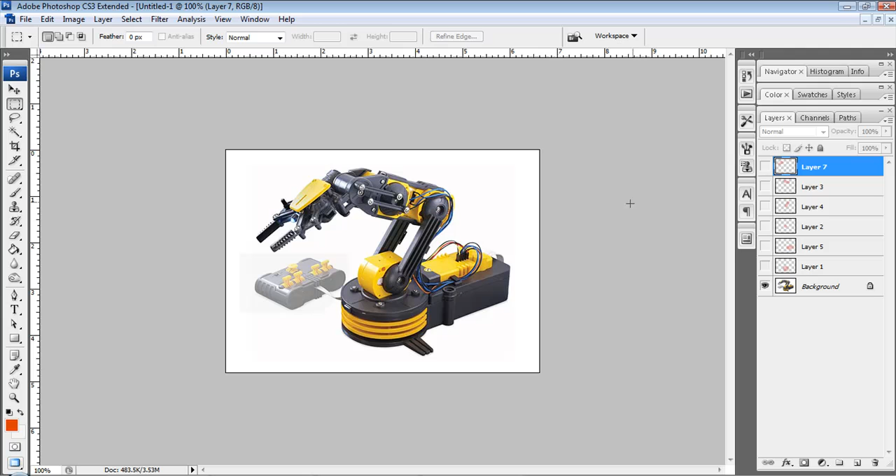So let's break down the actual model. The lower section here would be broken up into two parts, the cylinder and the rectangle at the back. I'm ignoring these pieces here and just looking at the underlying shape. The middle section would be a rectangle and another rectangle, and the top portion would be a rectangle and another rectangle. I would ignore these pieces and just create this shape right here.

Same with this, I would keep this as one big rectangle all the way up here and ignore how this thins out to meet that cylinder. Once this is all set, it's very easy to add more detail, and doing it with the blockin first helps me keep the mesh a lot cleaner and everything ordered. It's less of a headache when you don't have to move all these little pieces around because something is off or the wrong size. So with that said, let's open up Max and start modeling this little arm.

Alright, so let's start modeling our blockin. The first piece I want to build is going to be this cylinder. So let's start off with that.

By going to the Create tab, you're going to want to click Cylinder. Then click, drag, release, and drag again, and that'll give you your height.

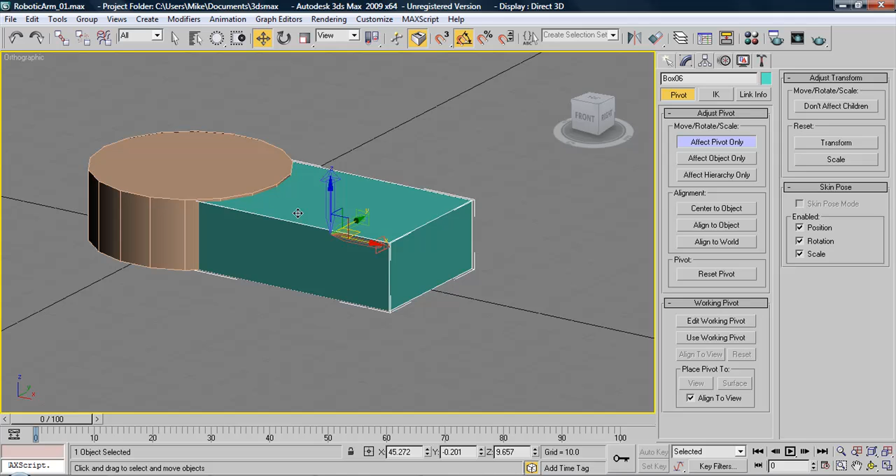So for right now this is fine. However, for this part I want to make sure it's centered to the object so that I can center it to the grid. So I'm going to go into the Hierarchy tab, hit Affect Pivot Only, and then Center to Object. And what that did was apparently center it to the object along the y-axis, but on the z it wasn't, so it'll center it to it.

Now what I want to do to make sure this is properly positioned on the grid is, down here it tells me where this object is located in space, but I want the y-axis to be located on 0. So I can either type it in, or I can right click it, which will zero out that spinner.

This works on anything that has these double arrows, whether it's in the parameters or wherever. Right clicking on the actual arrows will zero it out. So let's check this and make sure it's properly in place. And it is.

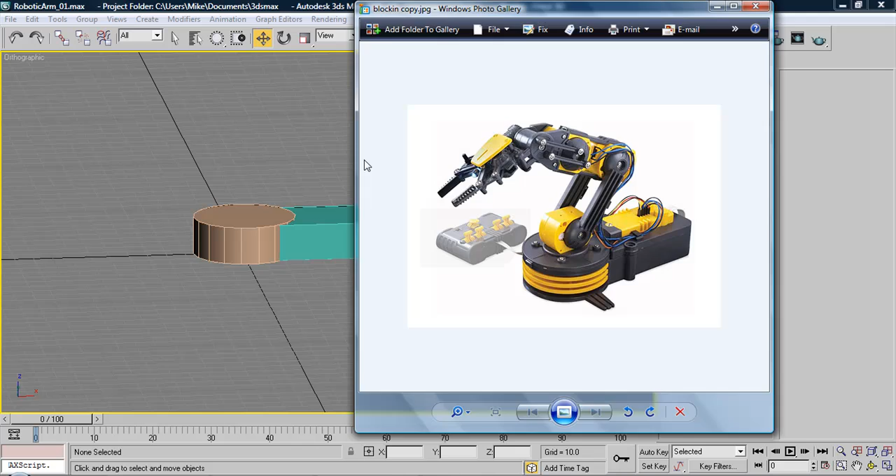Let's start off with this middle section here. We'll build this piece as a rectangle, then go to this piece, which is also a rectangle. Just affect pivot point, center to object, zero out, and then affect the scale. I'm using hotkeys for these buttons, which is W, E, and R.

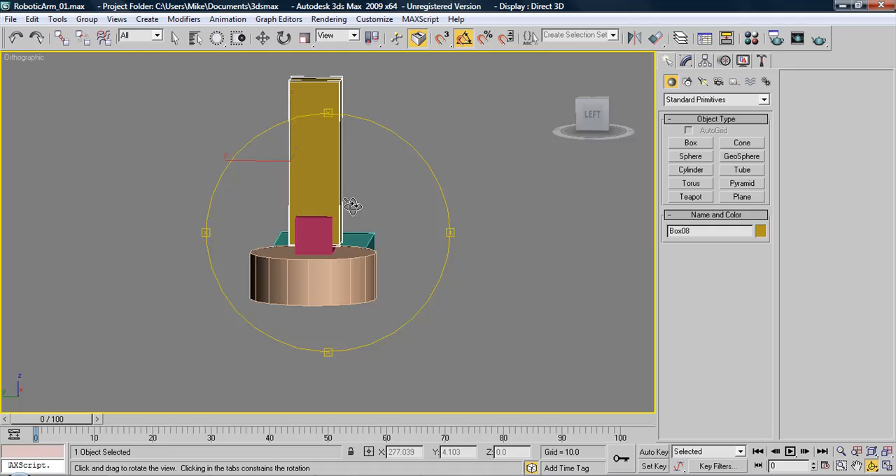Now let's build this piece here, which is going to be a rectangle as well. Zoom out a little bit, spin it around, and place this into space. Once again, the location of the pivot point isn't helping us at this point, but we'll be changing the pivot point in a second to make sure it's located properly on the grid.

Get out of the affect pivot point only mode so that we can scale the object. This looks like it should be good. Actually, make sure this one's centered right, which it is. I want to scale this out a little bit. Same with this piece.

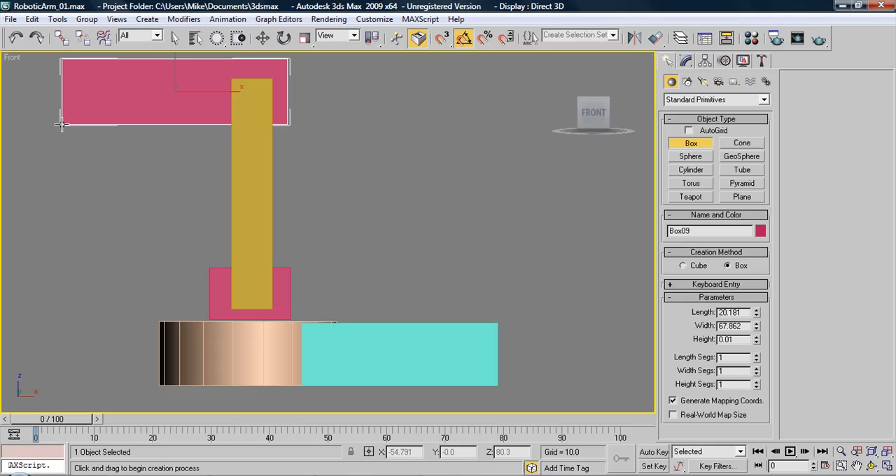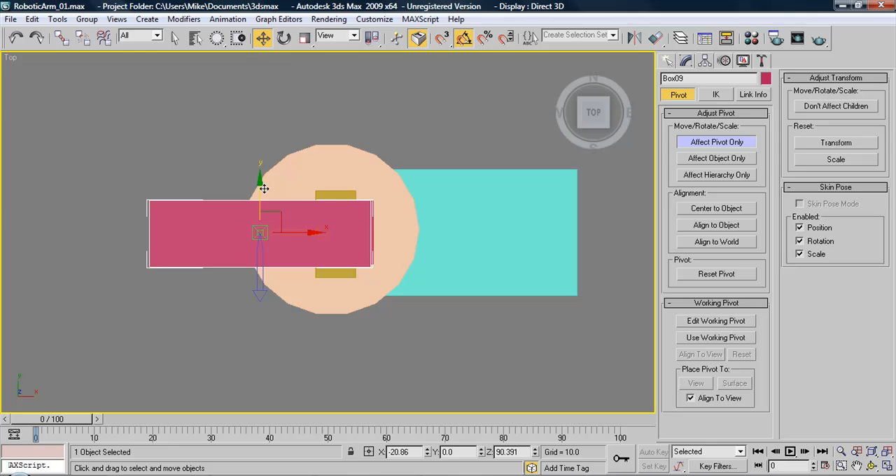Now let's take a look at the top. Hop into top mode, place this side that the pivot point is on where I want it, and scale it accordingly. Then do what we've been doing the whole time: affect pivot point, center to object, and zero it out to the center. Make sure you're off affect pivot point. Zero it out to the grid. Now we are set for that piece.

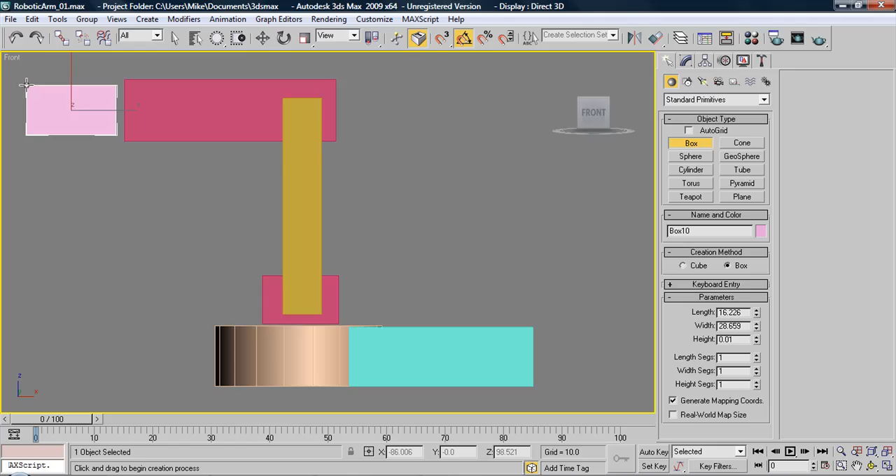Now let's add the very last section, which is going to be this part right here. About that big — maybe a little bit too big, but we can adjust that in a second. Once again, pivot point is in a good spot. Zero it out.

Right click, hop into the modifier panel. In order to edit the vertices, I want to right click on the box and hit edit poly. Hit 1 to get into vertex mode, and then scale those vertices and position them how I need them. The hotkeys for these would be 1, 2, 3, 4, and 5, and then 6 will take you back to object mode.

So now let's just check this against the reference, make sure our rough sizes are close enough. Pull this one a little bigger, which looks good enough for a blockin. Normally I'd have a blueprint which would let me check it a lot closer and be more precise, but with this one we're just eyeballing it, so it's not a huge deal if it's slightly off.

So now for the last thing, let's go ahead and rotate these as it was in the picture. Let's affect the pivot point and pull it down to where this part of the model is going to be pivoting from, and then rotate it. Make sure you're rotating with the angle snap toggle on — that keeps it at increments of 5, which makes it easier to rotate it back vertically and straight. The hotkey for that is A.

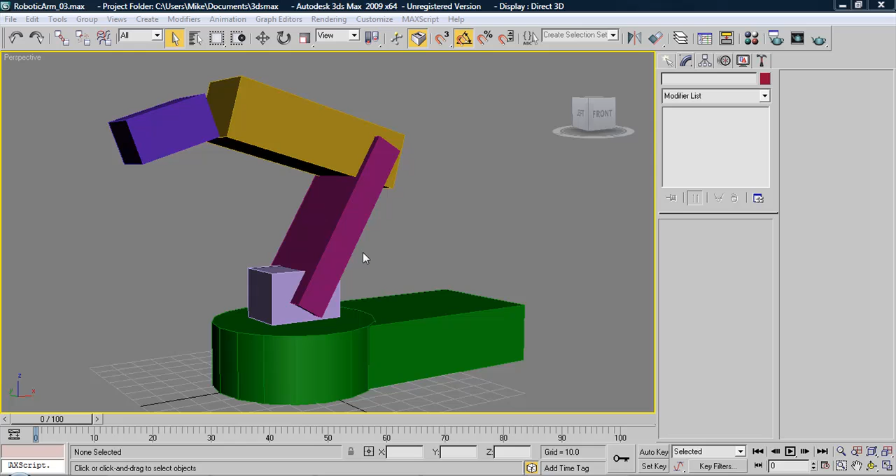So let's go ahead and add some more detail to the model. On the break I took the opportunity to make some minor adjustments to the model, and now let's look at adding some detail. We're going to start off with the lower portion here, and all we have to add is this big extrusion on the back, the cylinders on this rectangle piece, this extrusion on the front on the cylinder, and also this little rectangular piece down here.

We're going to try to bring this up to a level that would be used in a game, and then from there we can step it up, and you would add more detail, all the little tiny fine details, and it would become a high poly mesh, which would then be used to generate a normal map for our low poly mesh, which is what we're going to work on now.

So let's start by working in this rectangular area back here, and then we'll just keep moving along up the model. So we'll start off with this piece.

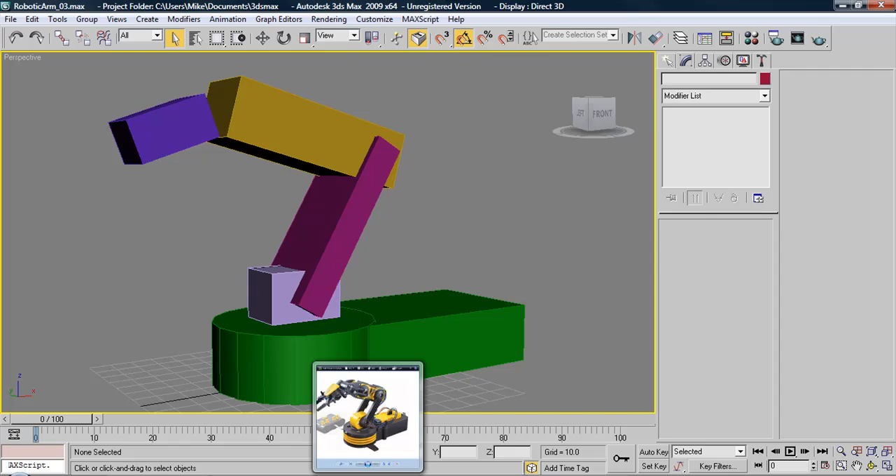The first thing I want to do is to round off this corner here, like you can see right here. Once I do that, I'm going to duplicate this piece to start as the base for this piece. A lot of what I do, I try to reuse as much as possible to keep it as quick as possible.

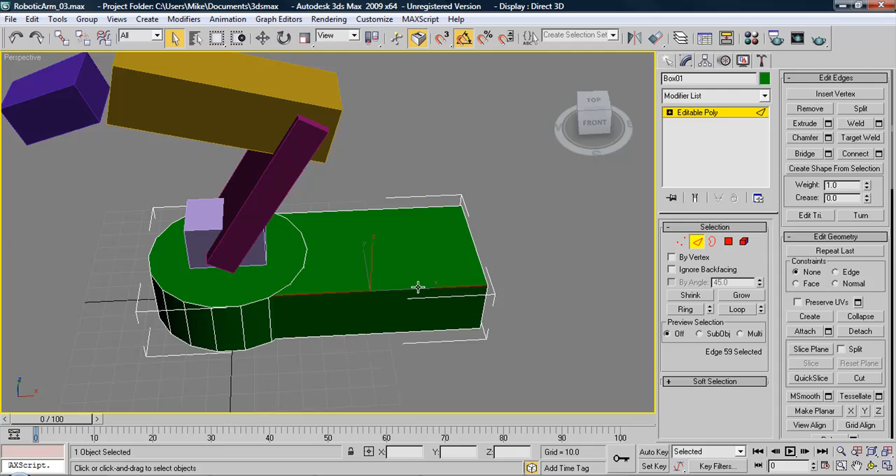So the first thing we want to do is to use the connect tool. You can see we're going to adjust, we're going to use slide, which adjusts where it is located on the ring that you've selected. And you have to have a ring selected or else it will not work.

So you would select one edge and click ring, and then it would go all the way around. We're going to need it about right there. Hit apply, and that lets you, it keeps the window open.

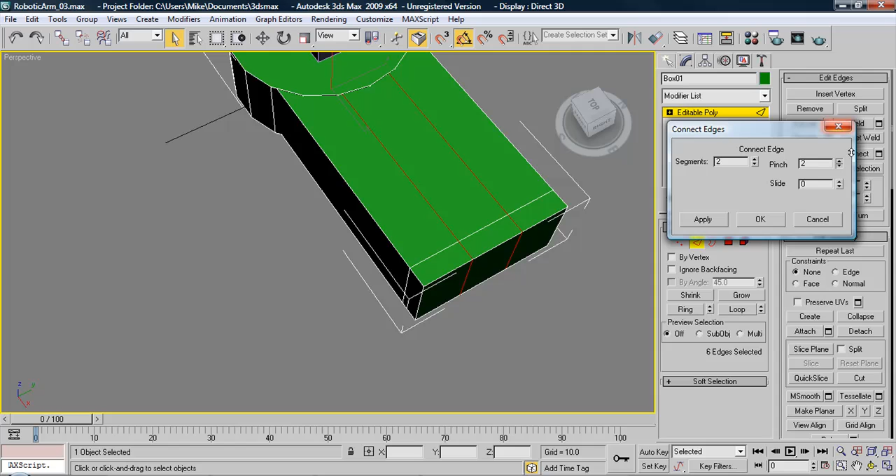Select this ring right here, and we're going to be using 2 segments on this one to go a little quicker. We're going to use pinch to separate, it determines how far apart they are or how close they are. So you're going to adjust that so that there's a nice little square right here.

Although actually it did not apply because I didn't hit apply. So make sure you hit that.

Let's go ahead and select these 2 vertices here. You're going to pull it in about halfway and scale it in a little more. And adjust that till the curve is how you want it. In this case, that should be more than enough.

So now we're going to use this mesh, this lower mesh here, to create this part right here. So you're going to switch into element mode. You're going to select this whole entire element. And we are going to hold shift while we're in the move tool and pull it up. Okay? And then hit OK.

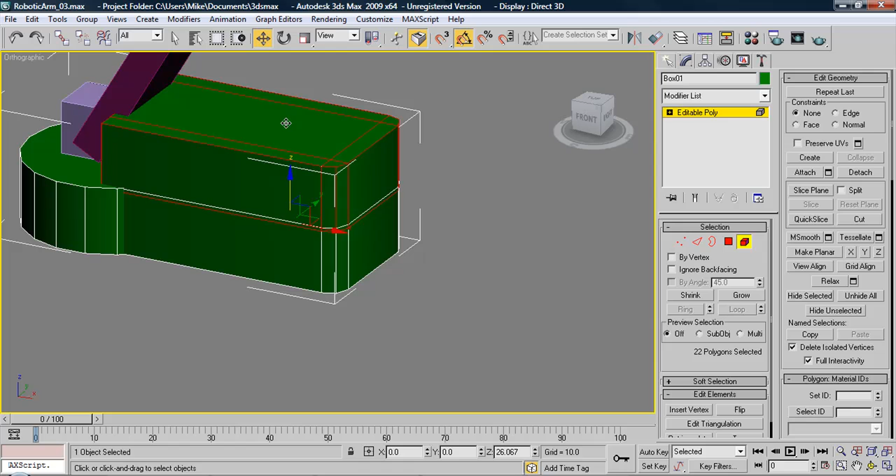Make sure that it's on clone to element. It keeps it within that object. Now we are going to scale it to the proper size for this piece. Right now, just looking at the top view, we'll worry about the height in a second.

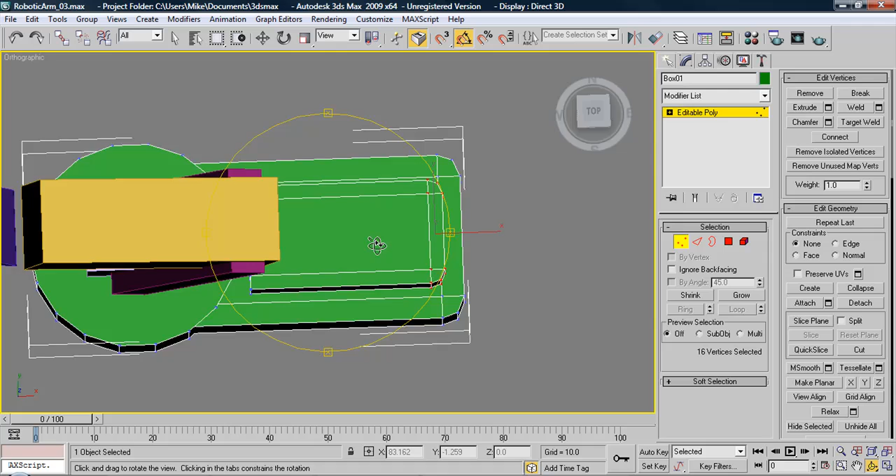Okay, so now the top is set. We want to adjust the height and put that in place on the larger rectangle.

Okay, now as you can see, they're pretty much the same shape, so all we had to do was some slight tweaks to the size, and that was it. The only other main difference is this right here, the chamfer along the top edge.

So we're going to want to select the entire top edge all the way around, except for the very front, which, as you can see, doesn't have that little angle there.

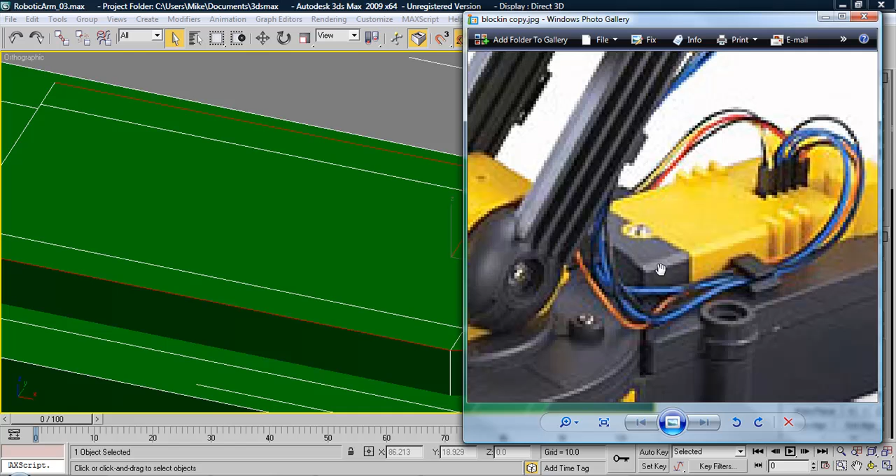So once that is selected, you want to click on the chamfer tool, which also has the settings. If you see a little box here, clicking that will give you the settings and allow you to edit the size and placement and everything of pretty much every tool, to give you a more exact cut or chamfer or extrusion or whatever the tool is that you're using.

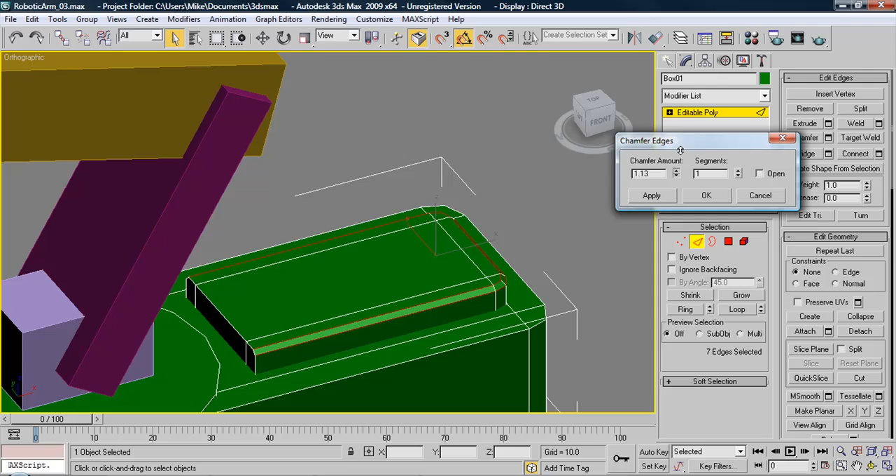So I'm just going to do this manually, however, for this one. Another cool thing for this tool is that it allows you to change the amount of segments in between, and it'll calculate and round off the chamfer there. But we don't need that for right now, so we're just going to do this.

And from there, our piece, that part of the model is now done. All we have to do for this back part is add this piece and this piece. So let's go ahead and make a cylinder. Jump into top view there.

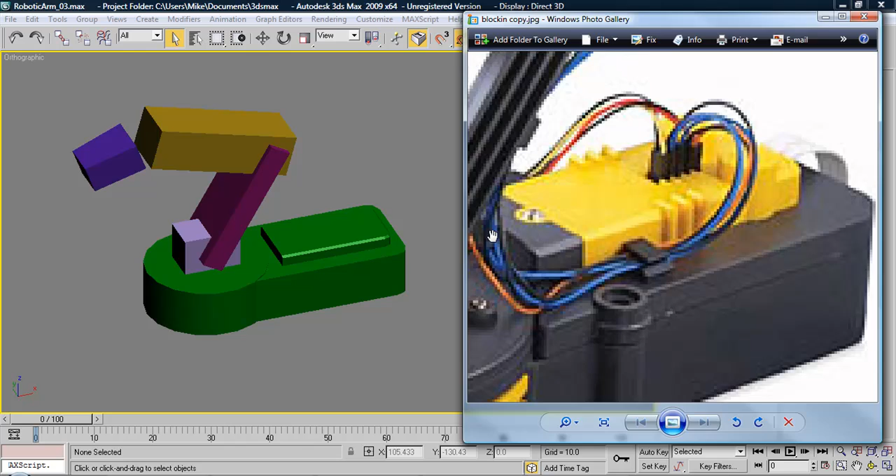Now, how the cylinder creation works is you drag it out and then you release and drag it up. So what that does, let me show you in an angle view here. It creates the radius, and then you adjust the height. So that's how you would do it.

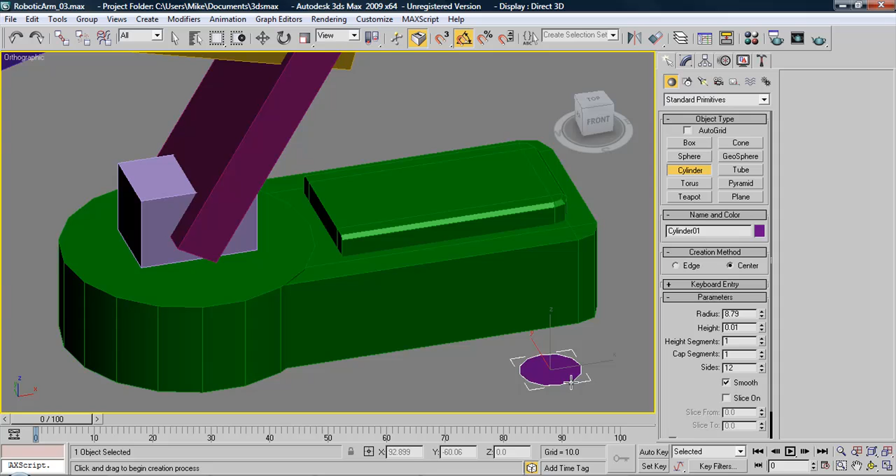Just the radius and then the height. Now it doesn't matter all too much here. Don't hit F1. F1 is bad. It's annoying. Okay, next, we'll adjust the height once it's actually in place.

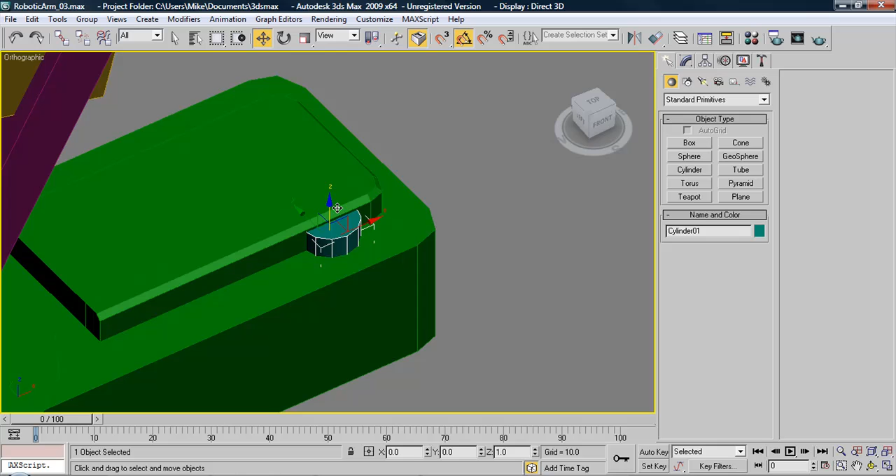That's about the size, maybe a little bit wider. And there we go, it's good.

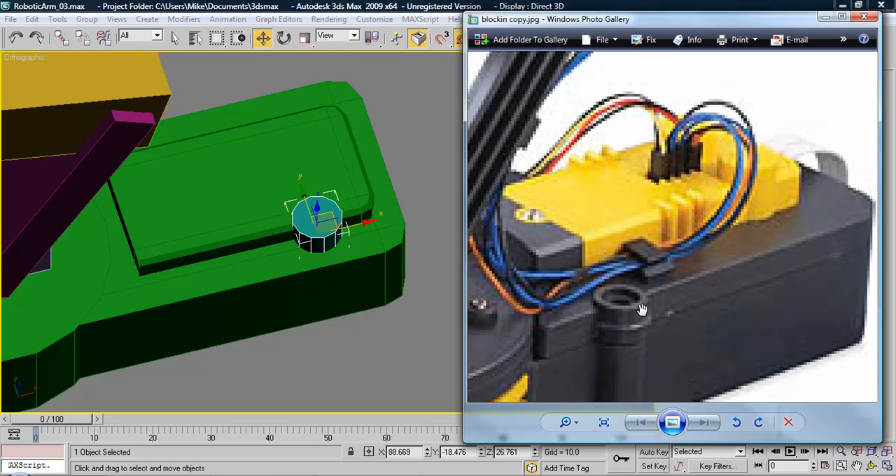Now we're going to use this same exact cylinder to make this tube right here. Once again, doing this just to save time. You can make a totally new object and attach it, but I normally do it this way and reuse as much as possible because it saves a lot of time.

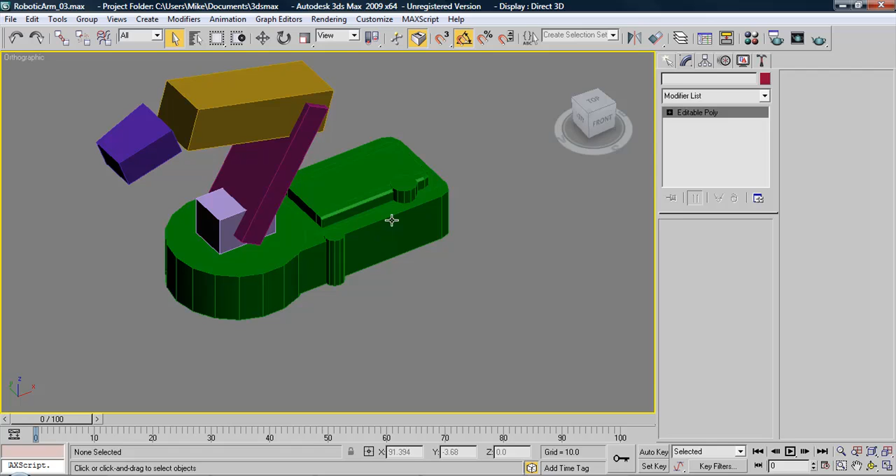So adjust that to the right height, scale down the radius a little bit, and that's about it for that back piece. Everything else we will add in the next detailing step, and so on and so forth until you have this model up to this detail.

So now let's go ahead and create this little extrusion right here, and then this rectangle piece. Now the tools we're going to use for this are the inset and the extrude tool.

What inset does is essentially what its name is - it insets the polygon that you have selected. From there, we're going to want to use the extrude tool, which extrudes the polygon you have selected. It's fairly straightforward and easy to understand.

I'm going to pull this up slightly. Now once again, all these have settings you can adjust to get a more precise inset or extrusion. If you want to be making a couple of these around the model and you want it to be the same exact size, then you'd want to set your setting and do it that way so it's all the exact same thing.

So now let's go ahead and add this little rectangle down here.

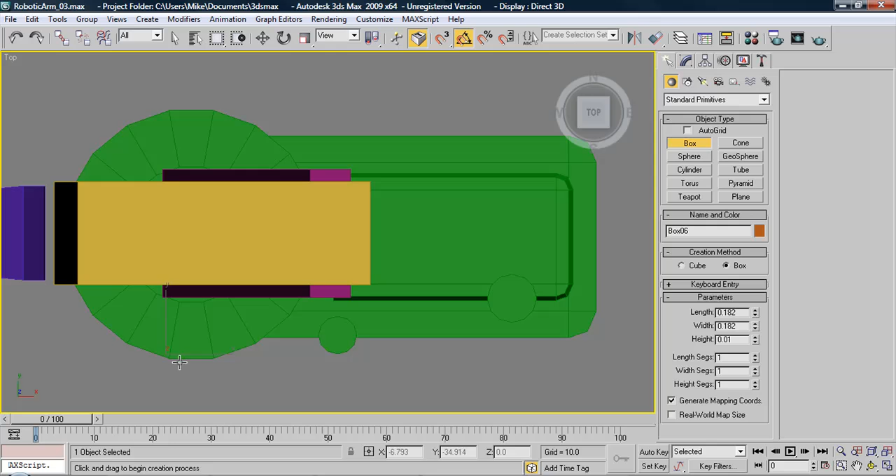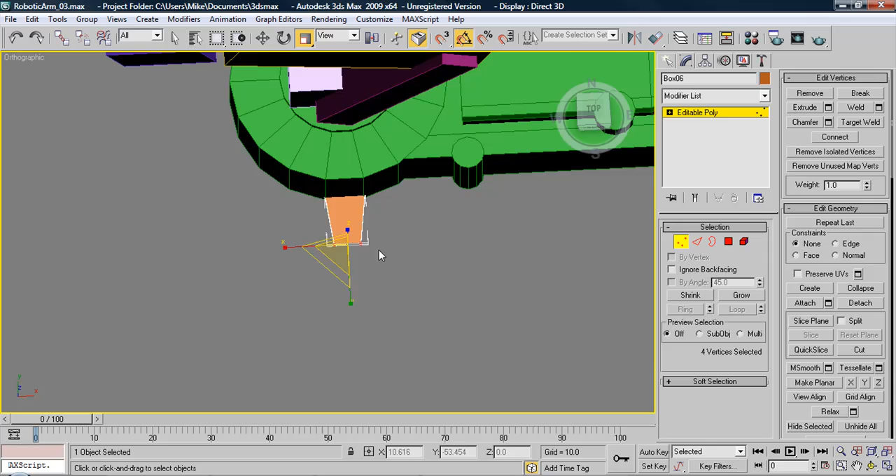Now remember, when you have created a new primitive, you need to right click and convert it to an editable poly. That lets you adjust edges, vertices, faces, the element as a whole. So you need to be in an edit poly to do any sort of editing to your mesh.

And for now, that looks good. So for a low poly model, this would be fine, depending on if you wanted those wires to be in the actual low poly model or not. This would be more than enough to create a more detailed mesh from. So we're going to leave this at this level for right now and move on to the middle section.

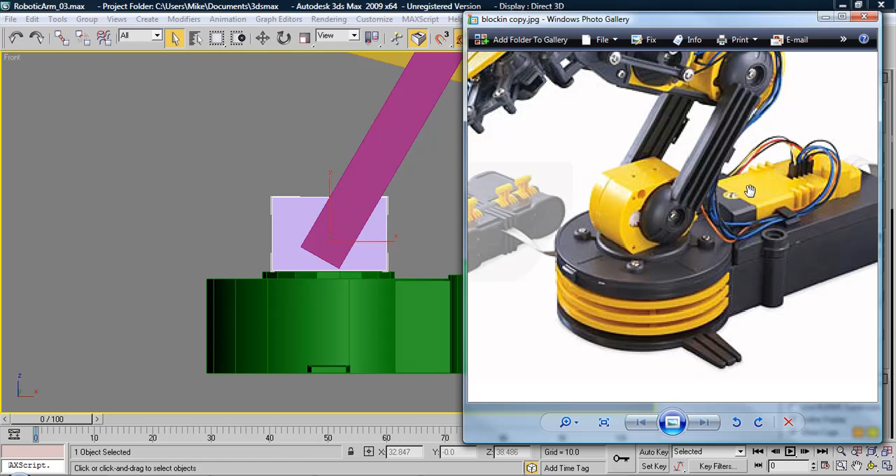Now we're going to build this piece, even though it's a rectangle here, we're going to start from a cylinder. So let's go ahead and do that. Same thing, set the radius, pull out the height, go into top view and make sure our width is the same as our blockin, which is the point of the blockin.

Now what we're going to want to do is connect the two middle vertices in order to make a flat top. As you can see, there is one right here. So let's go ahead and do that. Convert to edit poly, go to vertex mode, select the two middle vertices and connect them.

Now that they're connected, we can select the loop and use the chamfer tool to add that top ledge, and then select the front half, pull it forward, and select the other side and pull it to where it's supposed to be on the back.

Now this cylinder is scrunched up some more on the actual model, so let's go ahead and do that real quick. Scale it just along the x-axis. Keep an eye on down here, it'll say how much you did, 50%, 25%.

I did 50, so I'm going to make sure I do the same amount on the back. Just keep it going till 50. Now we're set. Drag that once again to where they're supposed to be based on the blockin. And now that piece is set. Adjust that however you need to.

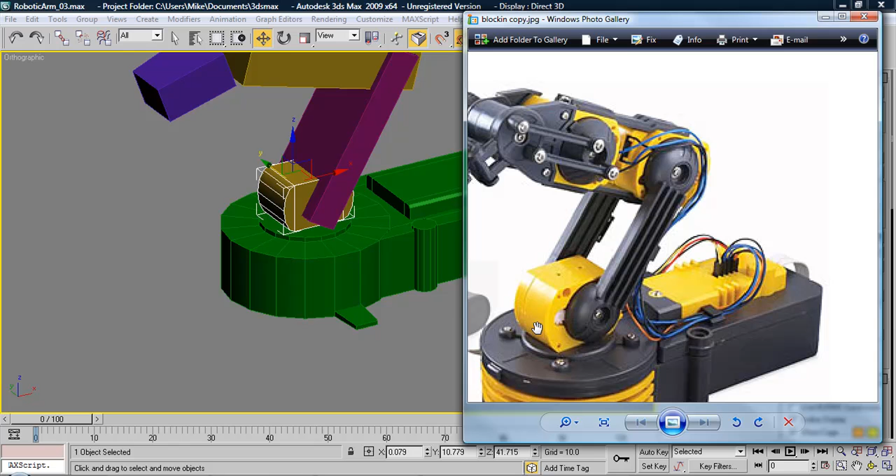And now let's go ahead and start on these pieces right here. Now there's two ways you can do this one as well. You can either start from a cylinder or you can start from a sphere. However, I'm going to start from a sphere because it's closest to what I'm looking for from this.

So let's go with 16 segments. Go into side view. You want to keep it somewhat low, as 32 is a lot, which is the standard starting amount.

So now we're going to go into the front view and scale it down this way. As you can see, it's kind of squashed and the front is cut off, so that's what we'll do next.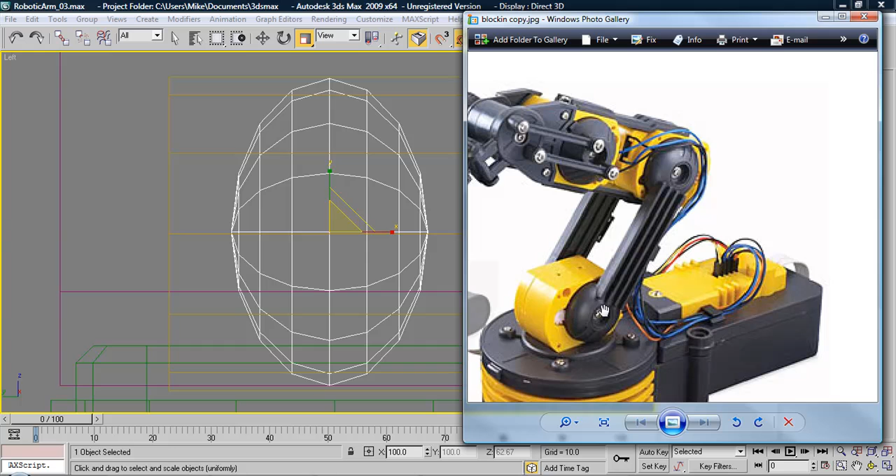We will convert to editable poly, select those first vertices there and delete them. And now we will be using the boundary option here to select that hole, that gap.

Select that gap and cap it up. What cap does is it puts faces and fills the gap there. Whenever you have a boundary, you can do that. Boundary's good too to check in case you have a hole somewhere inside your mesh.

You can just use boundary and try to find where the hole's located. Now the next step is we want to split this in half so there's half on either side, but keep it within the same object. So instead of detach as a new object, you would detach to element, and that will make it a new element but keep it within the same object, which is what we wanted.

So now let's unhide everything, unhide all, and place this in the right spot. Perhaps pull them out a little bit, scale them to the right size.

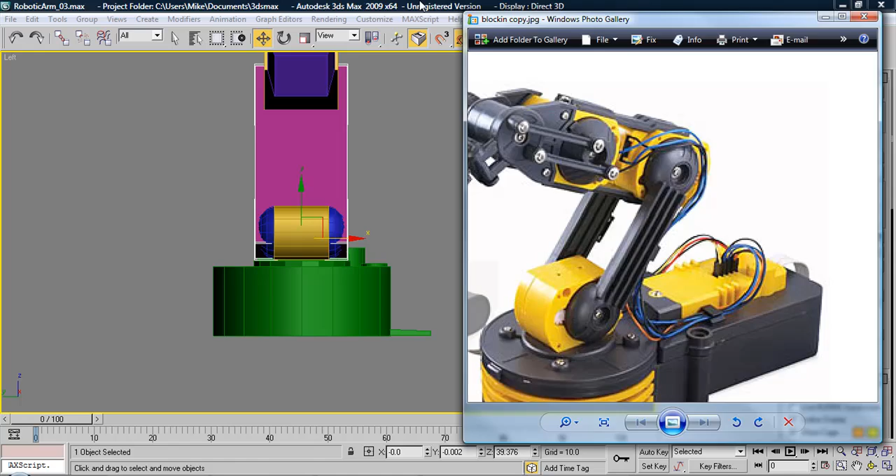And now let's create the middle rectangles. We're going to build it from our blockin mesh, which will be fairly easy because all we have to do is adjust this face here, pull it in so that it's hidden, and adjust this one as well.

Check the front, make sure we're pretty close, which we are. Grab these vertices up here and get them so they're not sticking out.

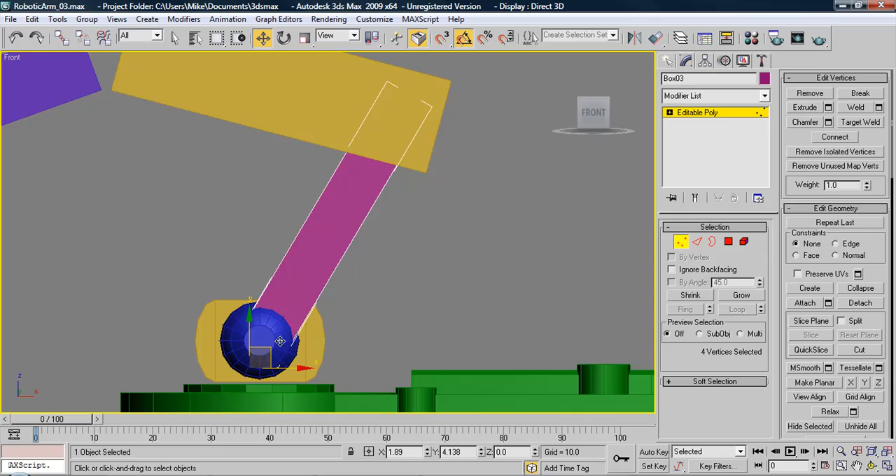Now what we're going to want to do is select this middle ring, go to connect settings, and we're going to use slide to set the two new loops on the edge of where it's supposed to be, which is right there.

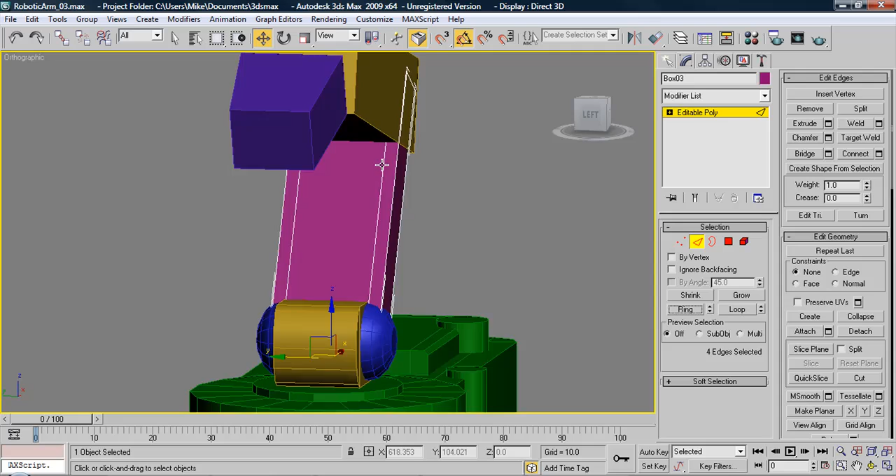Now we're going to press 2 to get to edge mode and select the ring. Now I want to delete these middle faces, so since we have the ring selected, all I have to do is hold Control and click on the polygon, and that swaps me over to polygon mode with that same selection.

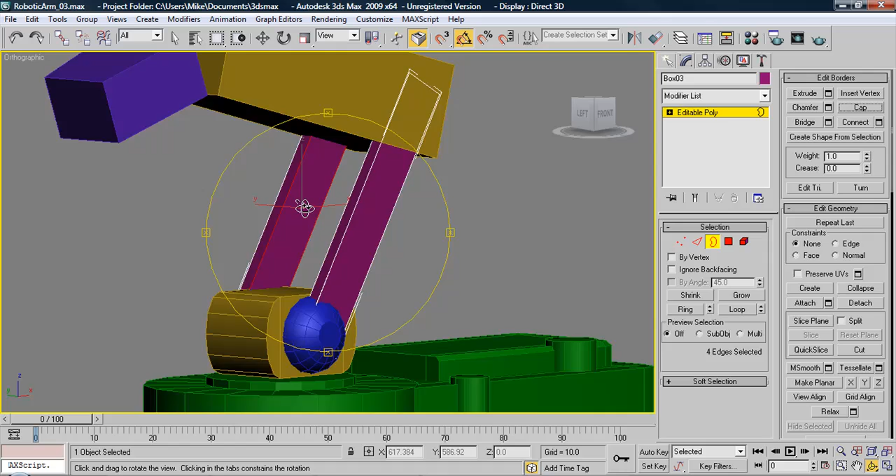So now we're just going to delete that, and once again we're going to use boundaries, which is 3 on the keyboard, and we're going to hit cap, and that'll fill in the gap with a face. And there we go, now the middle bars are ready to go.

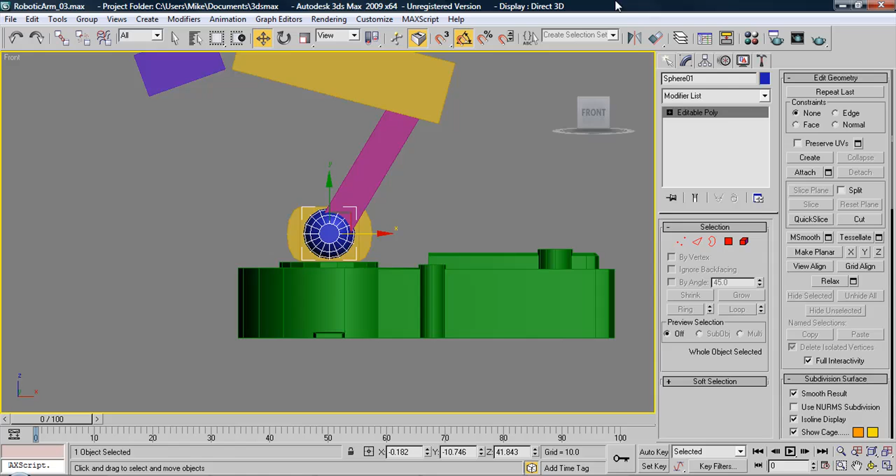The next thing we want to do is copy these up top to here, where there'll be the upper rotating devices. So let's hit 5 to go back into element mode, select these two pieces, shift drag up to about the center.

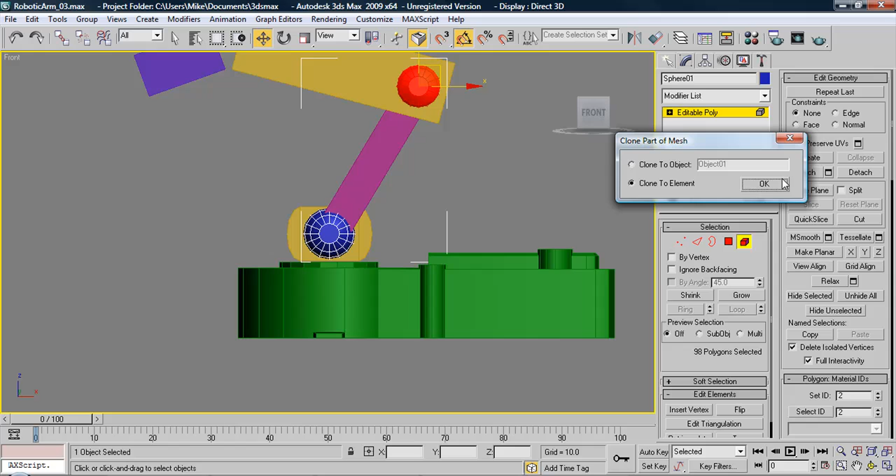I'm just estimating this now because this upper piece is going to change a lot once I start actually building the shape. Let's go clone to element, and now we can attach all the middle section into one mesh.

We'll leave that until we fix this top part up. So let's take a look at the top section and see what it's made out of. It looks like it's actually made from the same shape as this one down here, so we can duplicate this twice to get both these shapes and then build everything else on top of that.

So let's go ahead and do that, and also we're going to make an instance of this in order to make it easier. We don't have to work on an angle then.

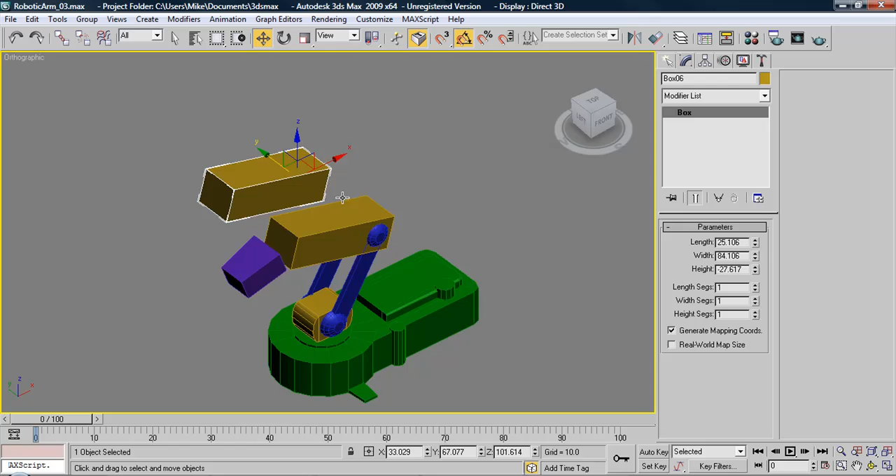Now what an instance does is when you are in object mode and you shift click, it brings up this clone option. Instead of being on copy, you want to throw it into instance mode. Before you do that, make sure you have it as an editable poly, or else you'll lose the instance.

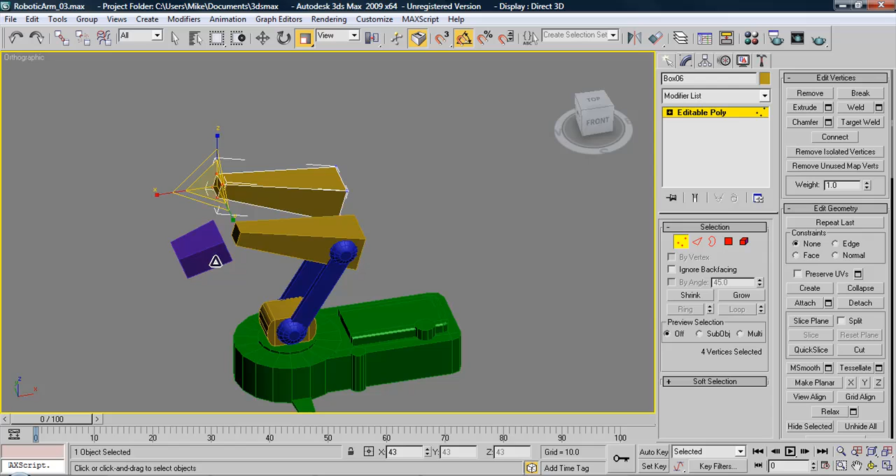So then you're not in any mode here, shift click, make sure it's instance, and what it'll do is anything that happens within these modes here, outside of the actual object mode, will happen to the other mesh, the other instance. However, if you hit 6 to get out of these modes and go into object mode, nothing you do there will affect it, which is really great.

Now what we can do is make sure that it's straight like this and not angled, and it'll be a lot easier to work on this one, and it'll transfer right over to here.

So let's go ahead and duplicate this, right there, adjust the size as it was a little bit. Oh man, see, just once you create an instance, make sure that you remember to take that option off when you do another clone, because you'll mess up the other mesh, and it's easy to forget like I just did.

So let's bring them together a little bit. Duplicate this. About right there.

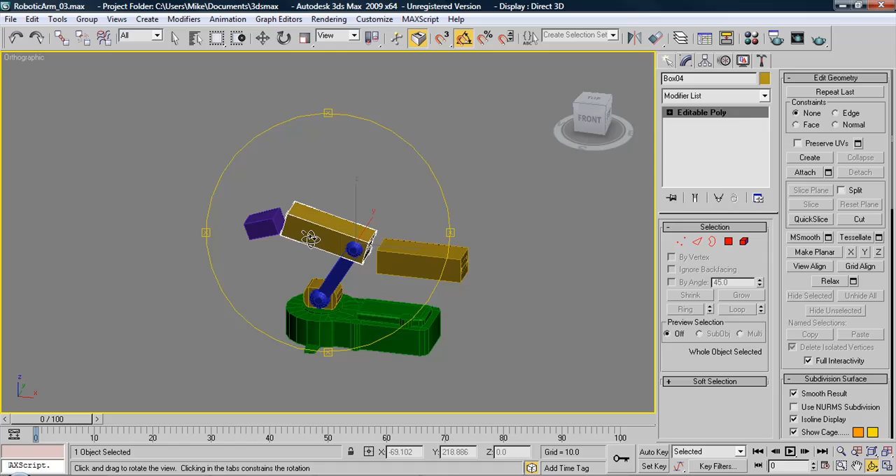Now align this. You want to make sure it's aligned to your instance mesh, and attach it. As you can see, it is now the same exact thing happened to this mesh, and we didn't have to worry about rotating it properly and adjusting it to this angle. So let's go ahead and delete this Blockin box as we're not going to use it again.

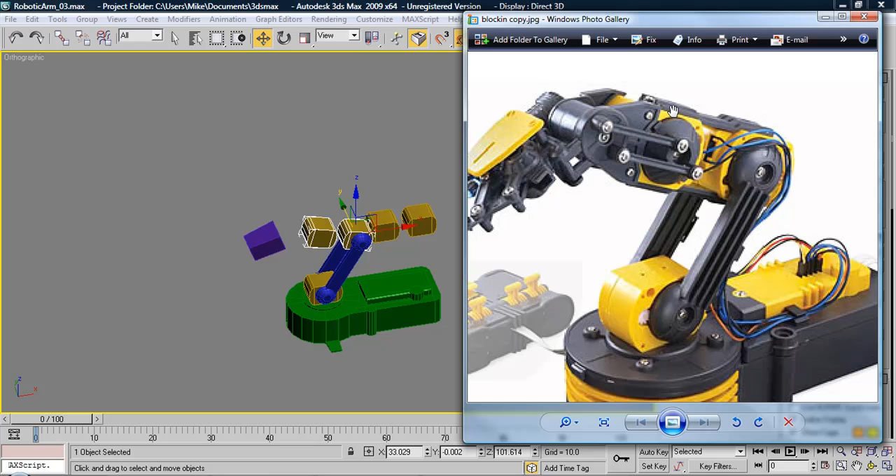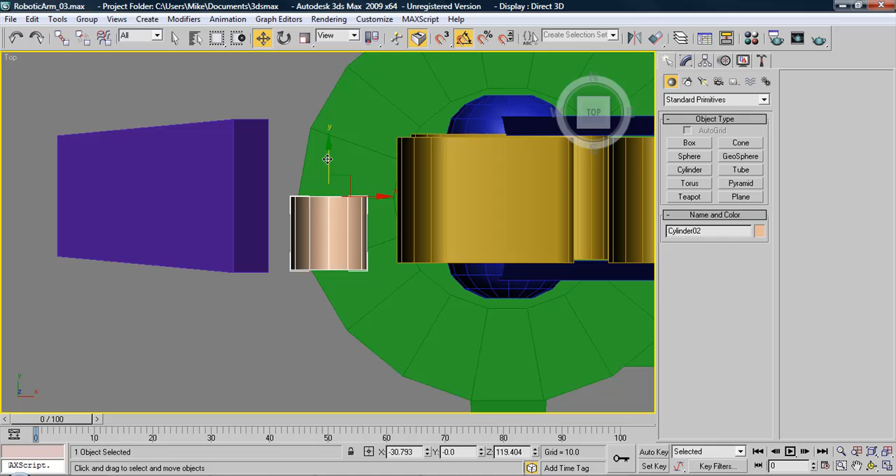Work on this front portion right here, and then we'll build this top connector piece. So let's go ahead and start with the cylinder. We'll use the instance mesh to make sure that we place it correctly, and then we'll make sure it's lined up right on the other instance. Let's go ahead and scale it to the right size and then attach it, and that looks pretty good.

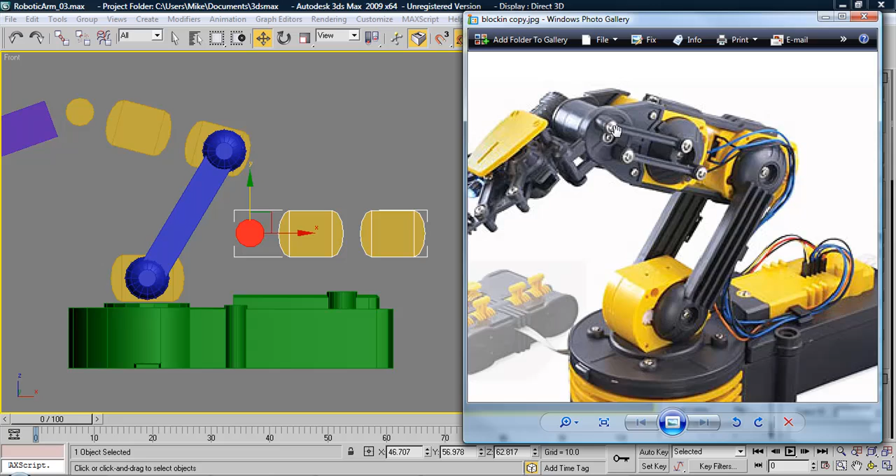Okay, so now we're going to make this piece. Once again, we are going to use something that's already made. So we're going to use the cap of the cylinder here, which already has this nice curve here, and we just have to flatten it out for the back. So let's go ahead and do that.

W for move tool, shift click, and then OK. Now we're going to go into the side view, scale it up slightly, and start to edit these vertices to the shape that we want.

Which is that, then there's a flat section. Right about there. And then this piece, and both these pieces. We can actually get rid of those by hitting backspace, and it'll straighten it out for us.

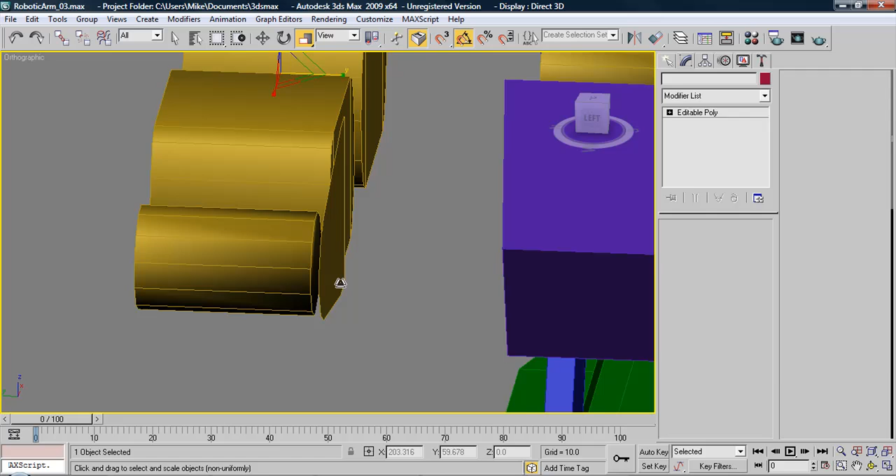So now we have this piece made, however it's just a single plane, as you can see, and we're going to need to add some depth and geometry to that. So how we're going to do that is to detach it from the actual object, just for a second. Detach to object. Now it is its own object. We're going to use the shell modifier, which adds the depth that we need.

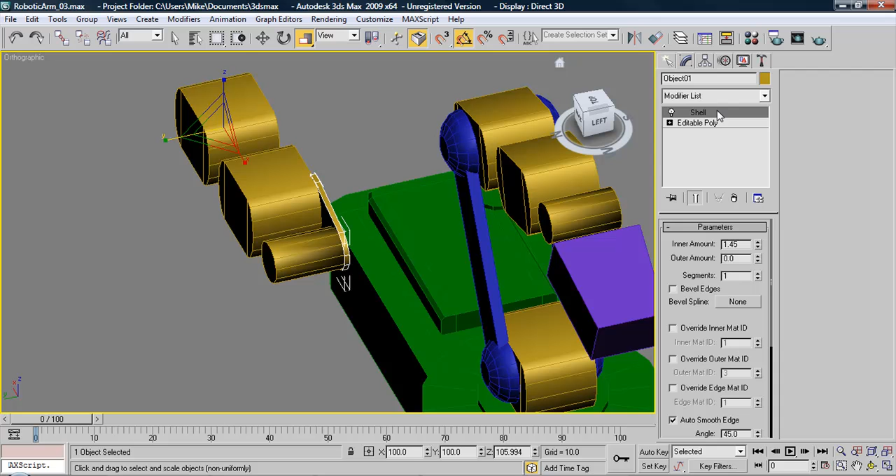As you can see, you can adjust the inner amount, you can adjust the outer amount, the amount of segments, whatever you need to adjust can be done in here. And then you would right click and collapse all. Hit yes, you're good to go. Now attach it to the actual model, to the actual object, and duplicate it across to the other side.

Let me see something here. Oh, looks like we have an error here. Looks like this has been deleted, which actually is good because I'll show you how to fix it. This happened when I hit backspace, and had one of these selected, so I'm gonna have to fix that up.

What you do is you select both vertices, hit connect, and it creates an edge across there. Now what we need is to have another vertex here to connect to this one. So what we're going to do is we're going to use the cut tool, which is another tool I use a lot. It's right here, cut. You click. When it switches to that, that means you're on a vertex and we'll build onto that vertex. So you want to make sure you're on that vert there. Click it and drag it across to here, to the other edge you just made, and put it in the center. And then right click and you're out of the cut tool.

Switch to vertice and go to your side view and pull this one down to be as close as possible to that other vertice. And now it is all fixed up, as you can see. So let's unhide everything and get back to work.

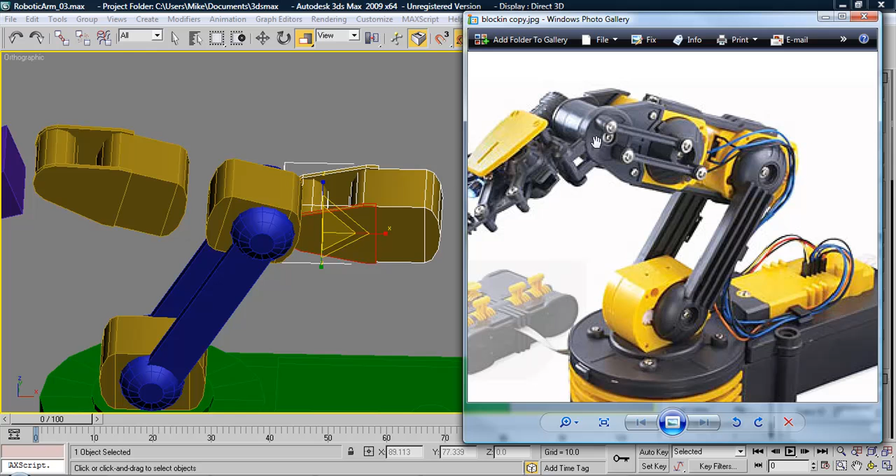The only thing we have left to do for this piece is build this connecting segment up here. So we're going to build it in very much the same way as we did this piece right here. We're going to create a basic outline of the shape itself and then give it depth using the shell modifier.

So let's pull this all the way across, go into side view, select both these edges, hit connect, and it gives us a new edge. Pull that over, do it once again. Now I probably should use the pinch and connect settings, which I'll use right now. So you can see it's a lot easier and a lot quicker. And then these two will pull down, create that little dip that was on that piece. Pull it up a little bit to account for the depth that will be added once we use the shell modifier.

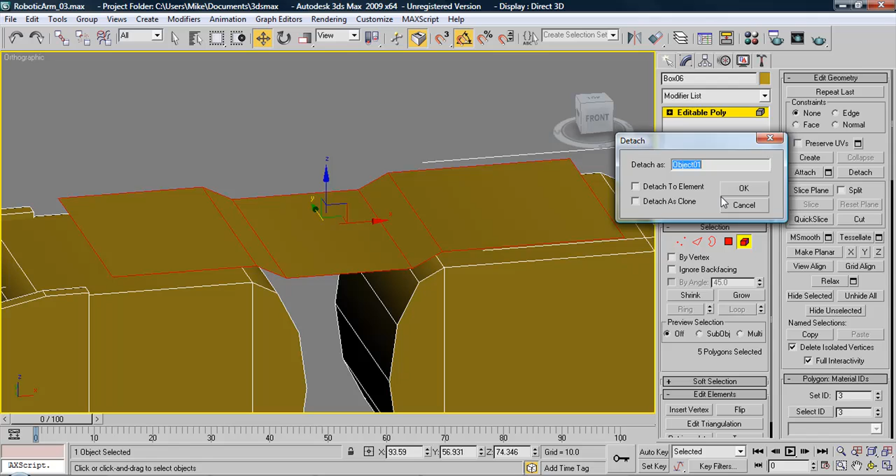Make this a little deeper. Select the element and detach it as we did before, and do pretty much the same thing. We're going to add a shell modifier—it'll already be set, so collapse it. I want to scale it in a little bit and then attach it.

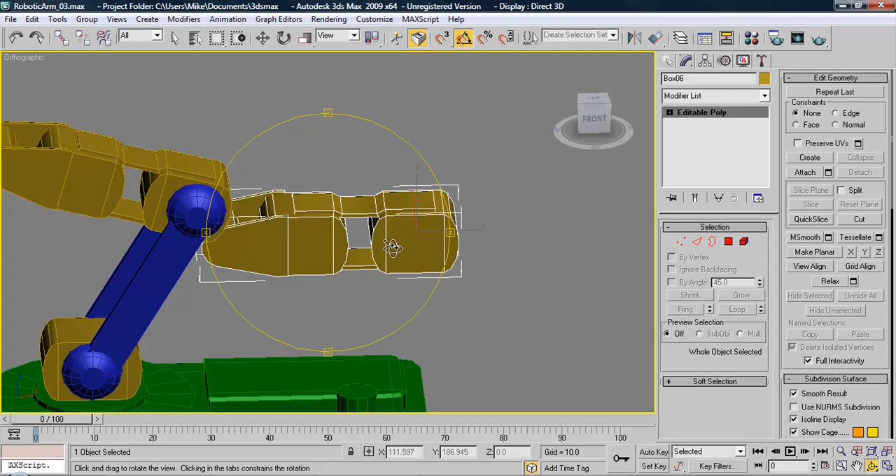Now all we have to do is adjust where we want it, duplicate it, and rotate it around to the other side. You'll see I have angle snap toggle on right here. What it does is rotate it only in increments of 5 degrees, which is good because you don't have to remember how much you rotated it—it'll always be the same exact increment. So I generally have that on a lot, unless I need to rotate it slightly and not at 5 degree increments.

So now this piece here is pretty much done. What we have to do is adjust it to the center of this circle here and add this piece right here. So let's go ahead and do that. We'll build the cylinder, set the radius, set the height, go into top view and adjust it where it should be.

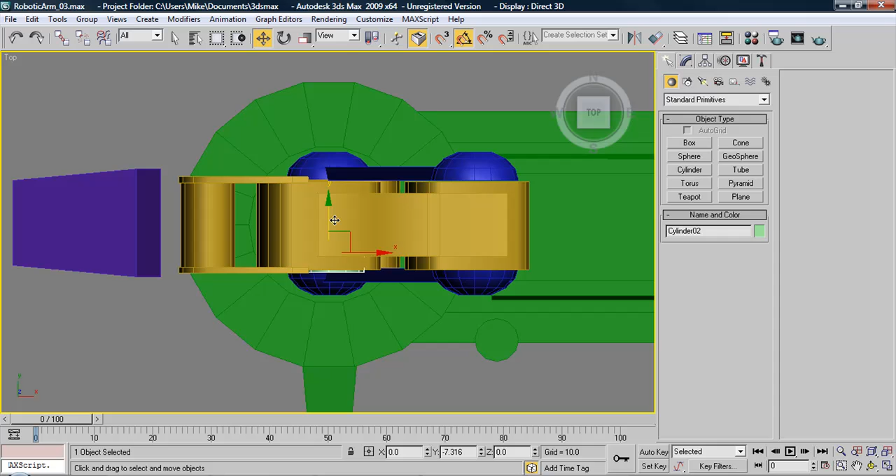Side view again, constantly going back and forth. Normally you'd have a couple windows open so you can go back and forth, but I want to do it bigger so it's easier to see. Oh also, Alt-W will maximize a window when you have multiple windows open, so just something to remember.

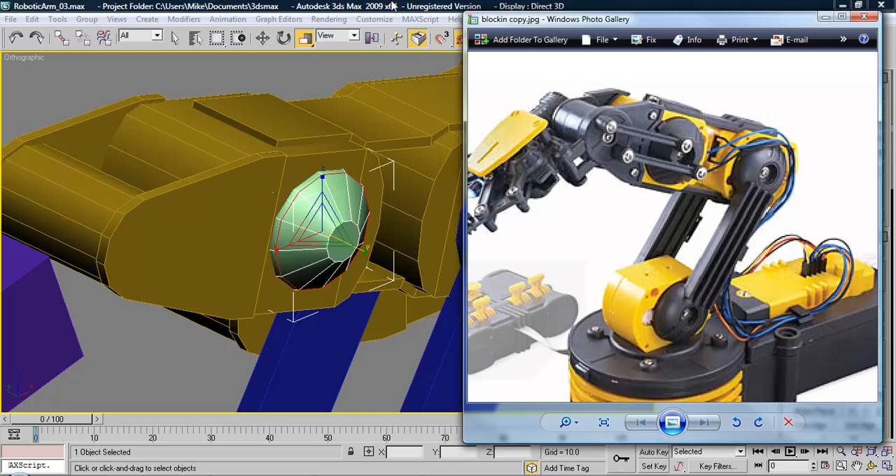So let's go ahead and scale this down. Add another cut using connect. Scale that out and pull it back in to make the little lip that is on—it is right there. This piece right here is sticking out a little bit too far, so pull it back in.

A lot of the work is going to be just little adjustments and building up your ability to see those little proportion and size changes you need to make, and in time it'll come and be a lot easier for you to do quicker. So now let's connect that, attach it to that mesh, and now we are set.

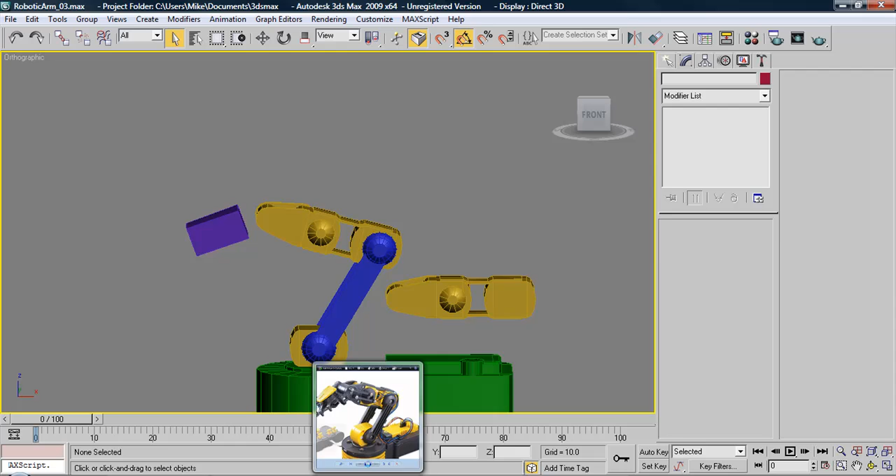We just have to do this last piece here, which is probably going to be the most simplified of them all. What we're going to be doing is looking at this as one shape and creating this cylinder right here, looking at this part right here as one shape, and then building this. So even though it's extremely complex, if you went into a more detailed mesh it would be multiple parts.

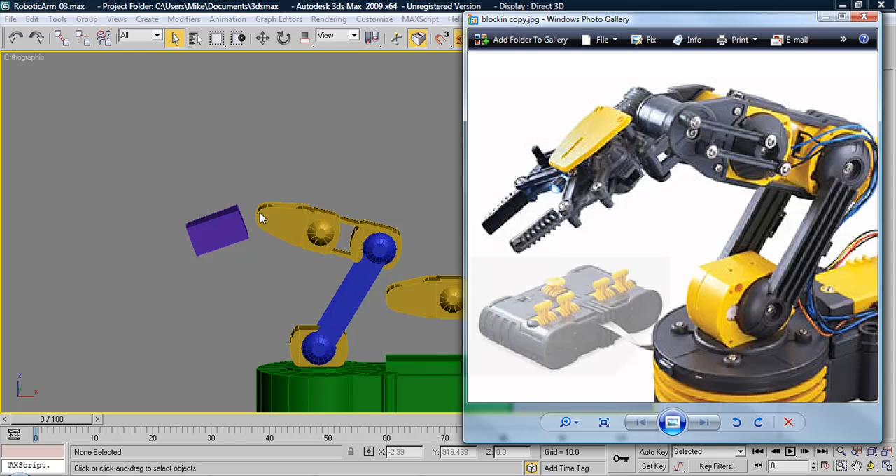I mean, there's 1, 2, 3, 4, 5—so there's a lot of parts, but we're going to simplify it for this low poly mesh, and later on we can add more detail if we want. So we're going to do the same exact thing for this one, since it's angled at a weird angle and there's going to be a lot of little stuff we're adding to it. We'll do the same thing we did to this one.

So let's go ahead, duplicate it, make sure it's on instance, rotate it down so we can see it, and then rotate it so it's straight.

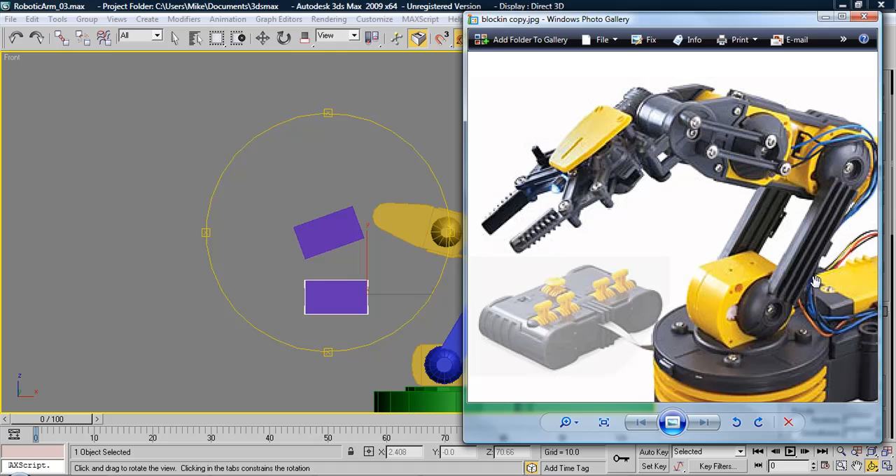So the next step is going to be to round it off and give it that little bevel like we did to this piece right back here, just to all 4 sides.

So actually what I'm going to do to keep it simple and easier, instead of having to select all those new edges, select these ones, chamfer it, do the same for the bottom.

And actually, we're going to do something tricky here. We're going to select this, go ring. Now we have the ring selected, but we want these two up here selected as well, so we'll hit loop as well, and that'll select the loop of all the rings selected.

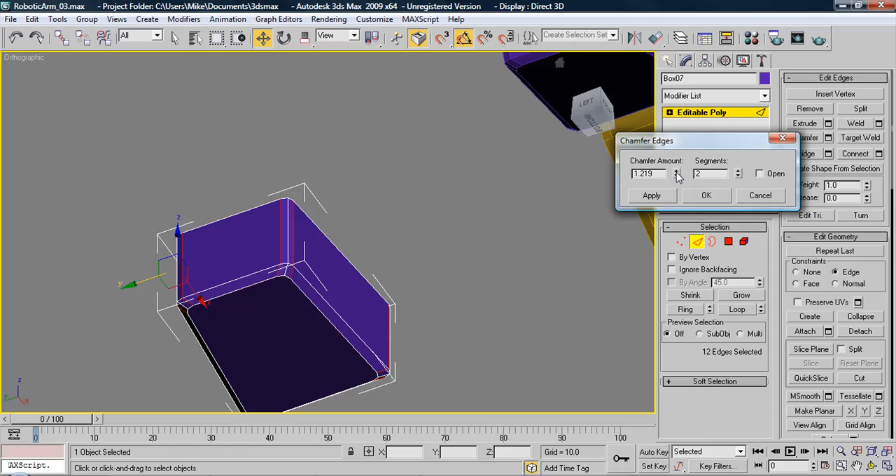So what we're going to do is use the settings for this, and hit 2, which will round off that edge pretty much exactly the same as it did for this piece, just without all that extra geometry. And it's a lot quicker. Normally you'd have to connect stuff like this in order to make it, if you were going to subdivide it, to keep it as an all-quad mesh, which for subdivision you want 4-sided faces throughout the whole model. That's why you would do that, but it's not 100% necessary right now for this type of model.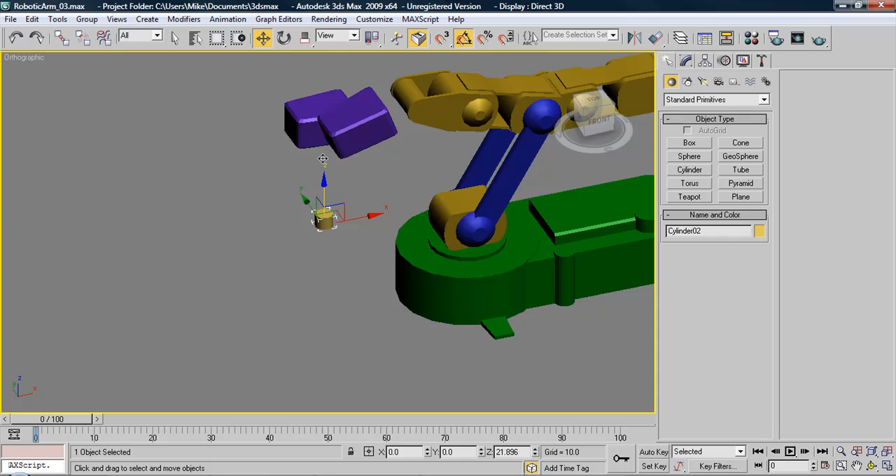So let's go ahead and look at adding the little details in here. We'll start off with that cylinder. We'll do like we've been doing the whole time—set the radius, set the height, then drag it up from the grid, which I took off. G disables the grid, just so you know.

Hotkeys are going to be a huge help for you in speeding up your process, and learning them and setting them so that it's easier for you to remember is going to be extremely helpful.

So we're going to hit connect. We're going to want to create this part right here, how it goes in, how it bevels in. So set that, click the top face, scale it in, maybe bring this up a bit. I think I want to make it a little wider. Now duplicate it across to the other element and attach it.

Now this piece here is going to be all one piece, so I'm going to drag this over here so that I can see it, because it's kind of a tricky shape.

Okay, so I want to build it like, start off with a box, make it an editable poly, and now this one is gonna take some thought, because I gotta continuously check that reference picture I have. Now this doesn't have to be 100% exact, because it'll be adjusted once you build your high poly model and get all that detail in there. And you'll want to make sure the low poly model is close to what you've detailed it with. So that should be good.

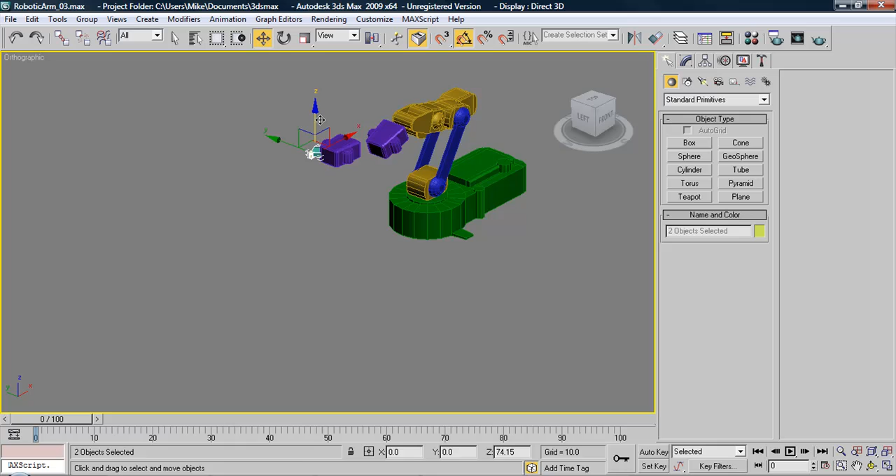I'm going to build a cylinder here in order to make it look like it's actually connected, not just like sitting there. So now that's set. Drag both of these up to just underneath that bevel.

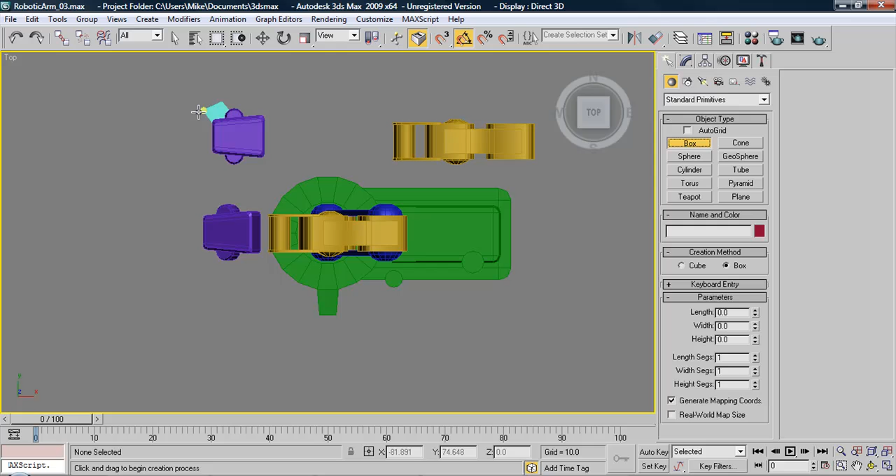And the last piece we have to do is this part. So let's, well actually last two pieces, and then this piece right here that connects it. Let's go ahead and do that. Rough size is good. And let me check the height. Ooh, height looks good. Set it in place.

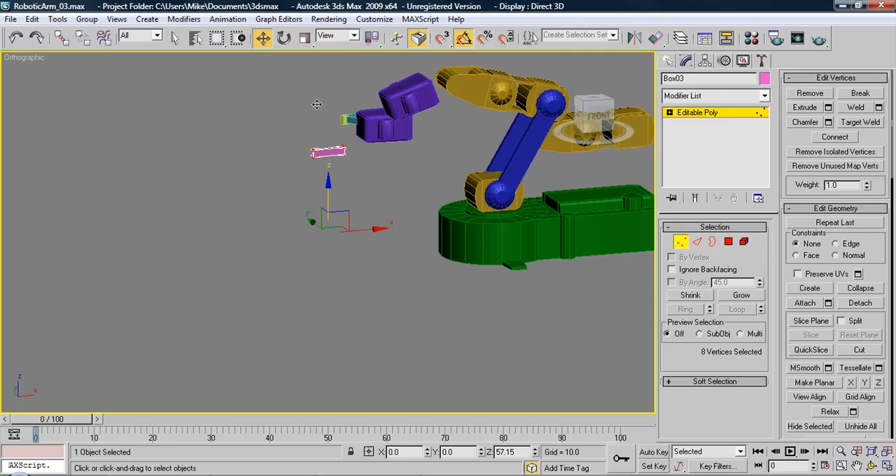And then I'm going to actually do this here. If you have an instance, and I'll show you what I mean. If you have an instance and you want to mirror this piece right here, okay, and or you want to use shell or something, and you have a modifier on top, when you collapse it, that mesh becomes - it's no longer an instance.

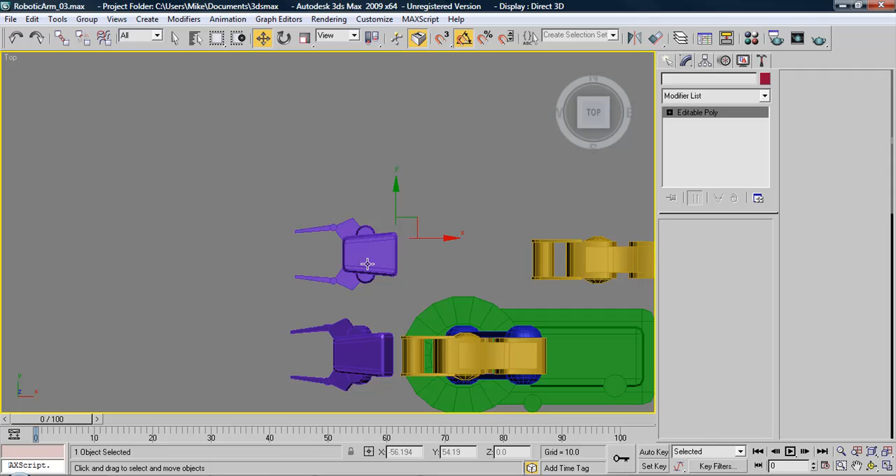So normally what you would want to do is here, let me show you. So we add a modifier, we add the mirror modifier, mirror it over the z-axis. Set it in place and collapse it. What it does is it collapses this mesh, but it doesn't do it to this one. So you want to either save it till the end or separate these to their own objects, mirror it, and then bring it back into your instance.

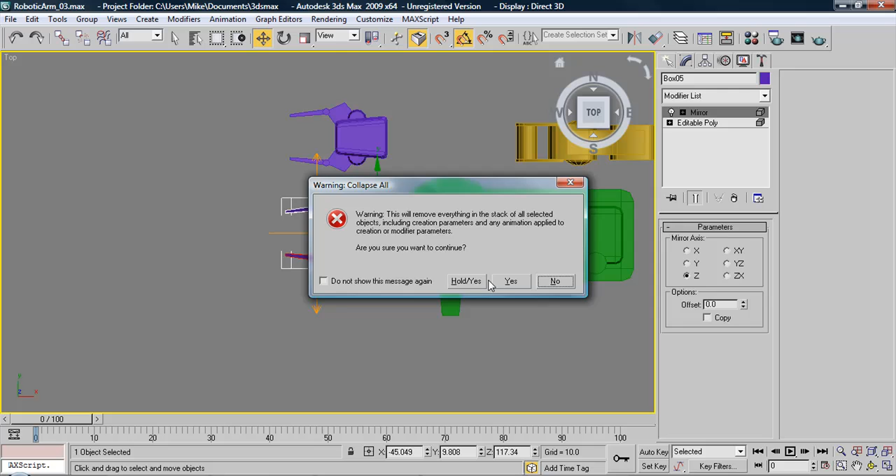For this case, it doesn't matter all that much because it's easy enough to copy again. So I'm just going to do that. I'll delete this one because I need to make a new instance. Drag it over, set it, pull it down a bit, rotate it back to straight, and we're set again.

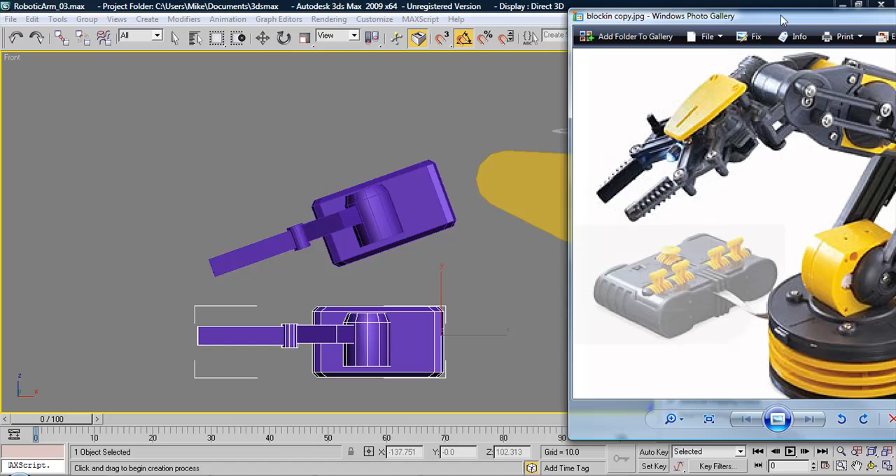So now we're going to make this piece, which will just be a rectangle and another cylinder. So fairly straightforward. As you start doing it more, you'll be able to look at even complex objects and see that it's how easy it would be to build from a rectangle or a cylinder or a sphere. Pretty much everything can be broken down into one of these very simple shapes that we've been using throughout this whole project.

It's just a matter of trying to simplify everything and not focus on all the details. Once you do that, it really becomes extremely simple to understand and grasp. And the more you do it, the quicker you'll see those little shapes.

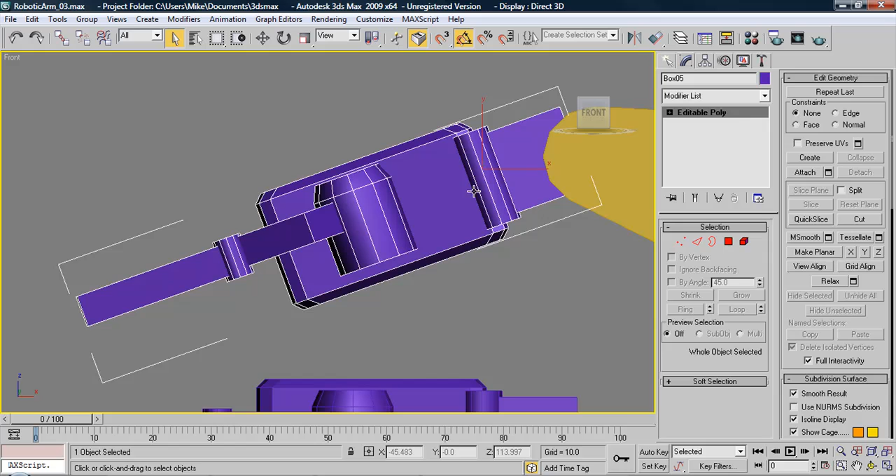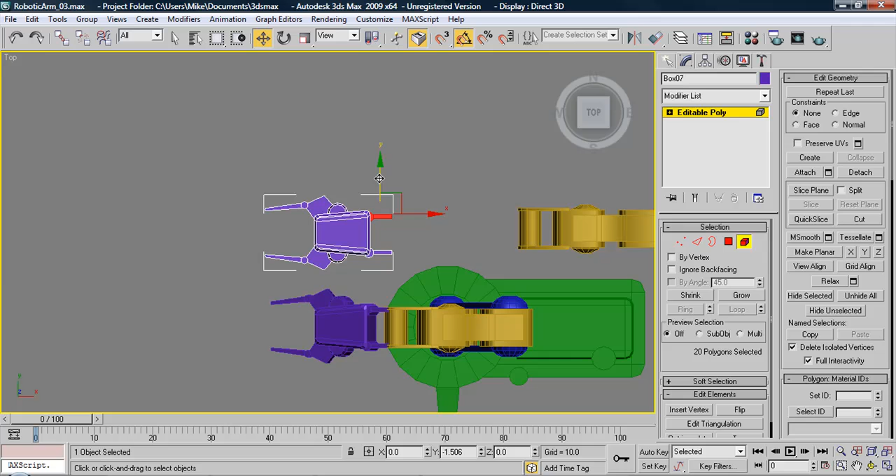So now let's adjust this piece to fit properly, and then duplicate this piece and mirror it. Actually, we don't even need to mirror it. Just drag it over. Let me bring that in a little bit.

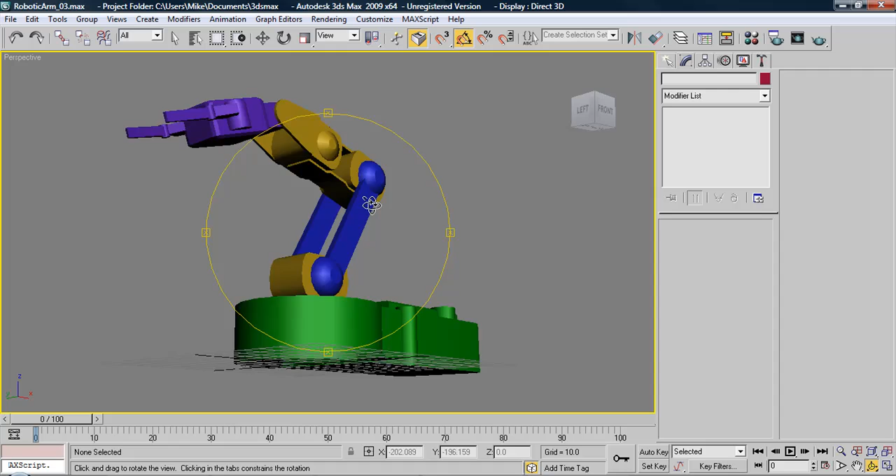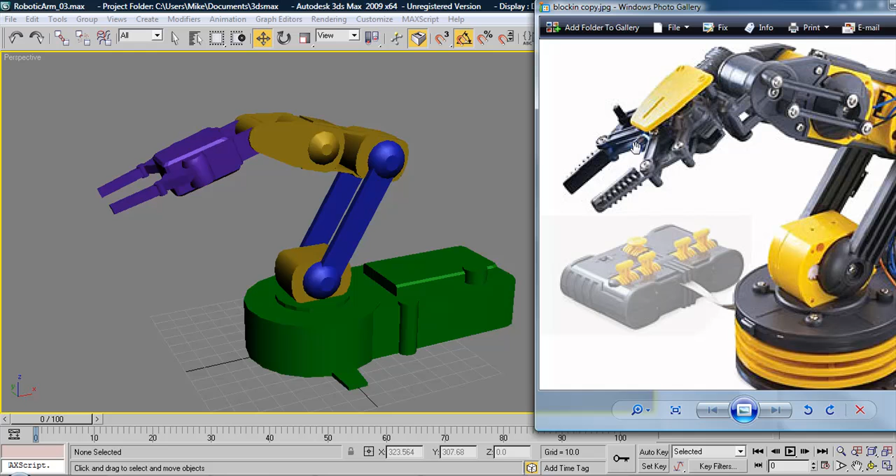Okay, and now we can delete these two because we're not using them anymore. And this would be an acceptable low poly model to build your high detailed high poly model from. Normally you would then have to come back in and adjust the actual model to fit the new details that you've put in, but this would be a really good starting place to build your high poly model from.